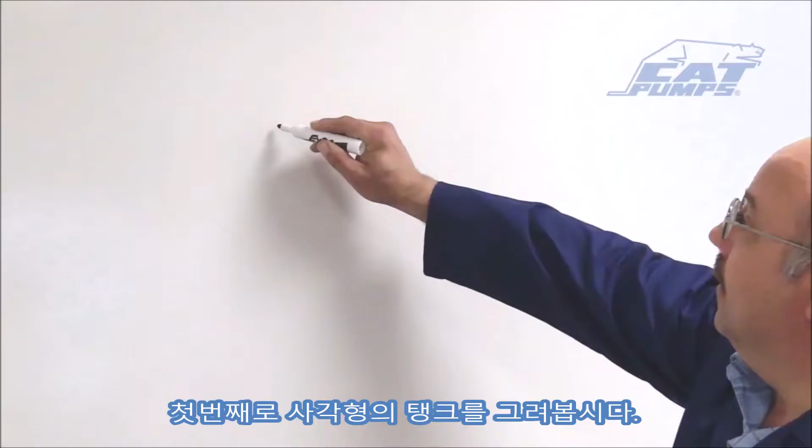So first of all, we're going to draw a nice rectangle feed tank, and we're going to connect to it an inlet line that goes to our pump.

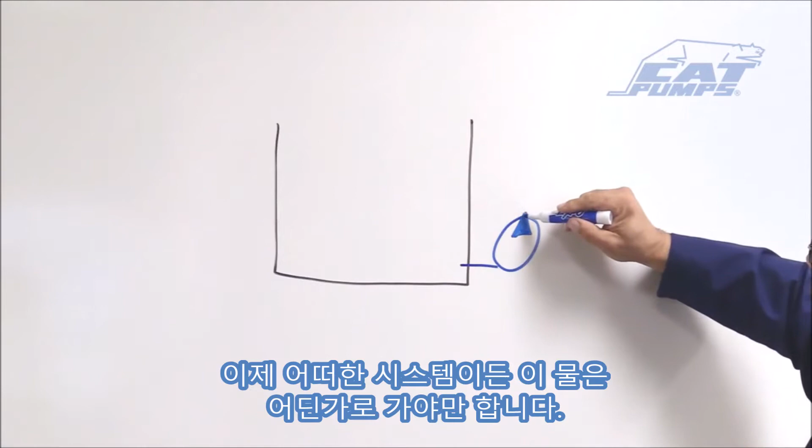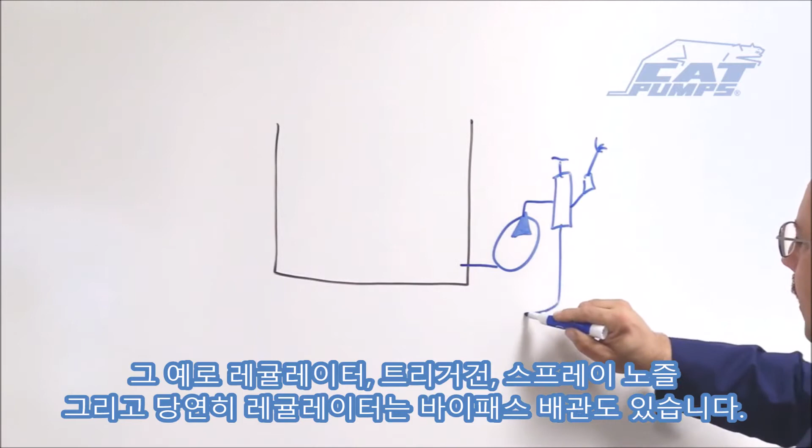Now with any system, this water has to go somewhere afterwards, so we're going to put in a little regulator here, trigger gun, spray nozzle, and of course the regulator will have a bypass line coming out of it. So we have to route this line back to the tank.

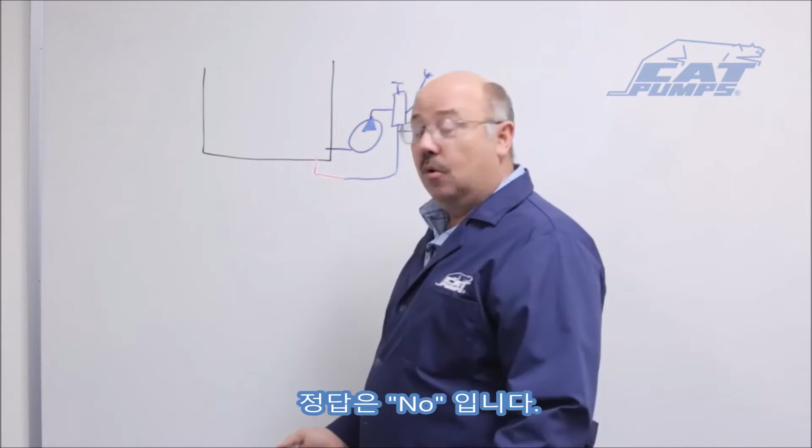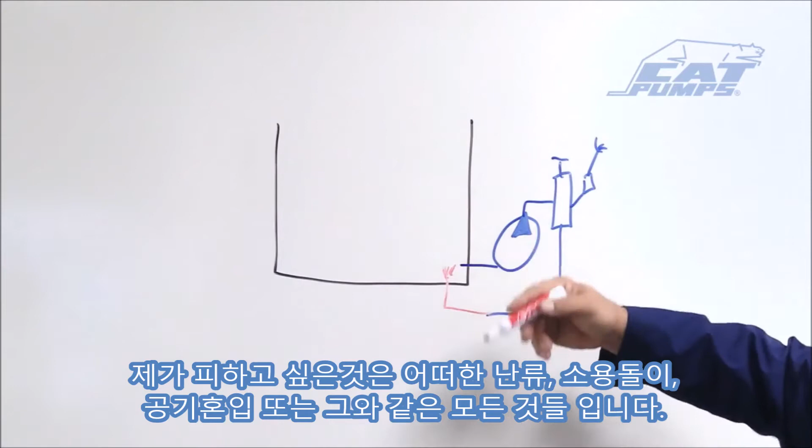So do I want to put it here? The answer would be no, because I'm going to get a lot of water coming back here, and this is my line going from the tank to the pump. What I want to avoid is any turbulence, water eddies, and air entrainment that can get drawn into the pump and cause problems. So I'm not going to run my bypass line there.

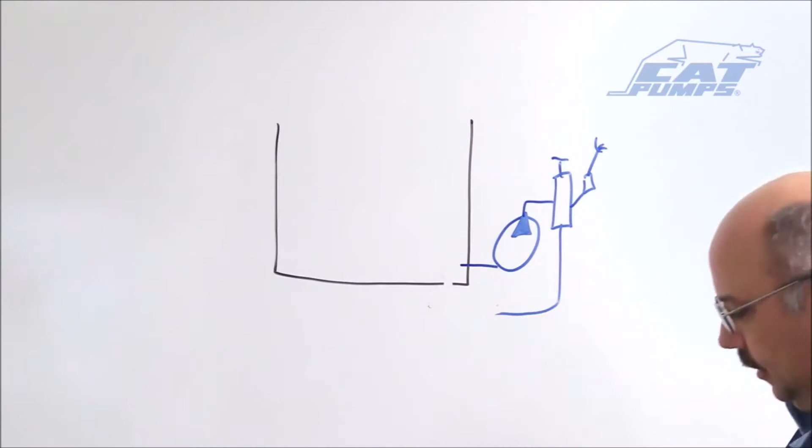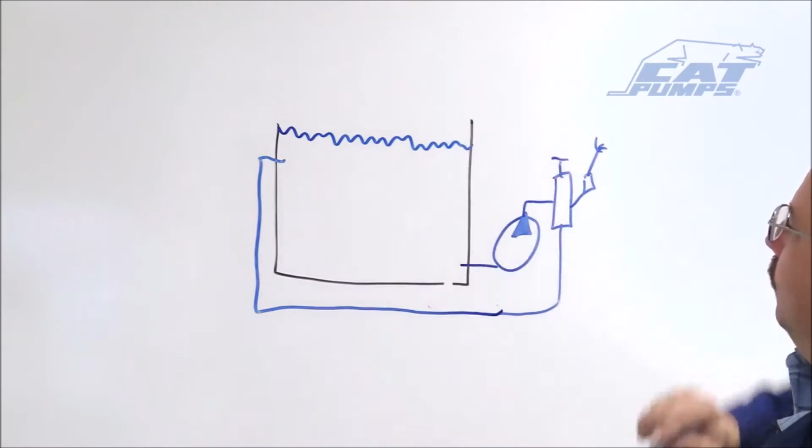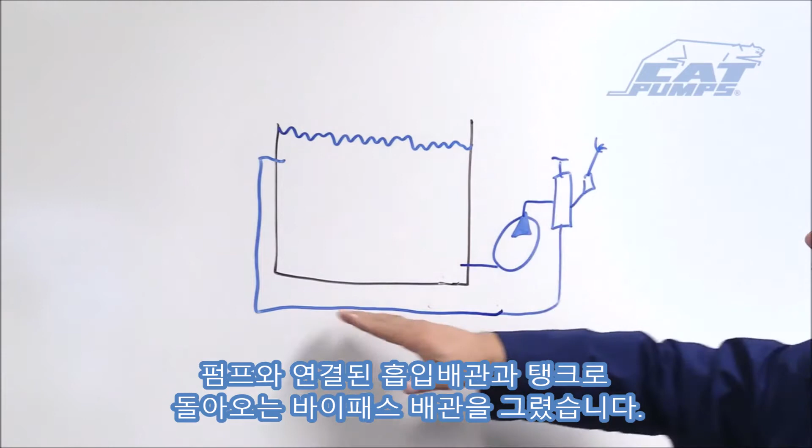I'm going to actually take the bypass line and run it over to the other side of the tank near the top. And of course I do have a level of water in here, and I got to repair this little hole I made so that it holds water. So now I have my inlet line to the pump and the bypass line coming back to the tank here, and this is my water level, so everything is good.

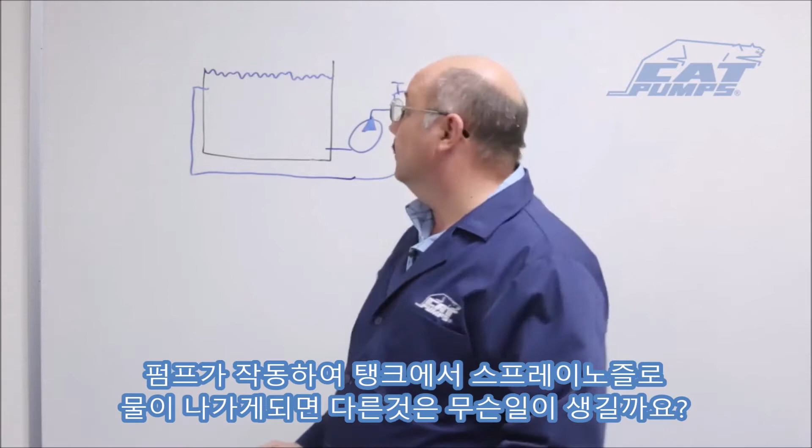Now the other thing that happens is when the pump is operating, it's going to draw water out of the tank as you spray out the spray nozzle. So as we're sending water out the nozzle, the tank's going to start to come down, so we've got to fill the tank at the same time.

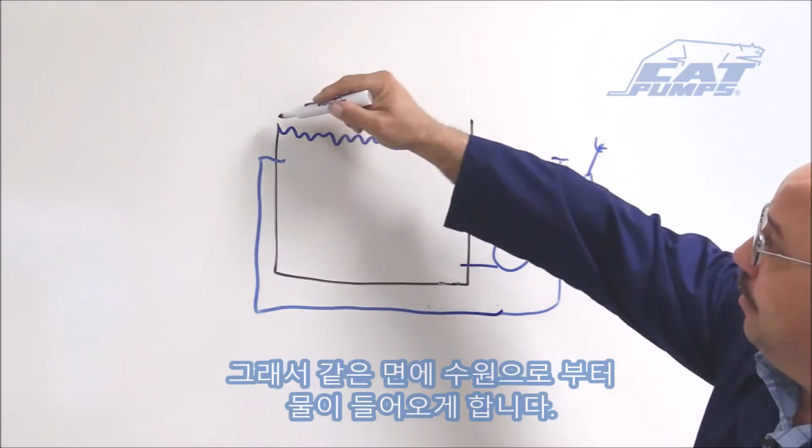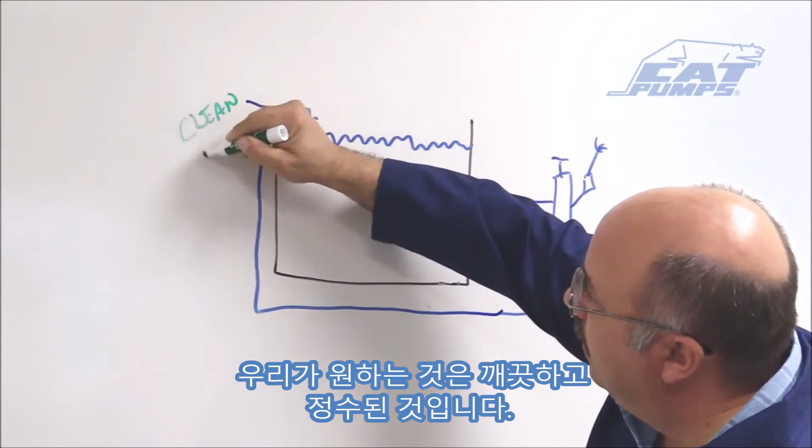So on the same side as the bypass line, I'm going to come in here with a source of water, and what we want here is we want clean and filtered. The reason we want this clean and filtered is if I don't clean and filter it at this stage, I'm going to have to do it at this stage, which is my inlet line.

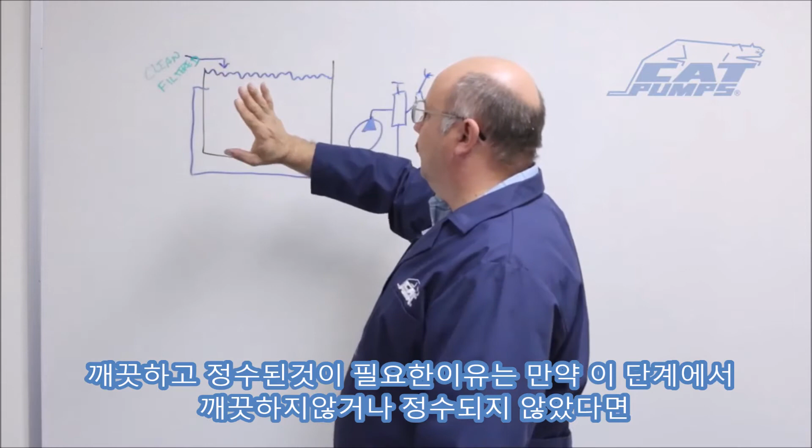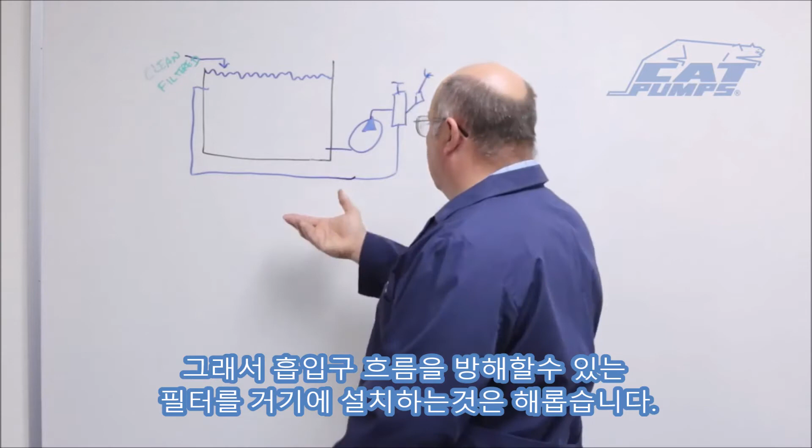And I don't have a lot of inlet pressure because of the vertical distance of the water here. I don't want to put any restrictions in the inlet line that are unnecessary, and putting a filter in there that can clog and restrict my inlet flow is detrimental. So I'm going to clean it and filter it before I drop it into the tank.

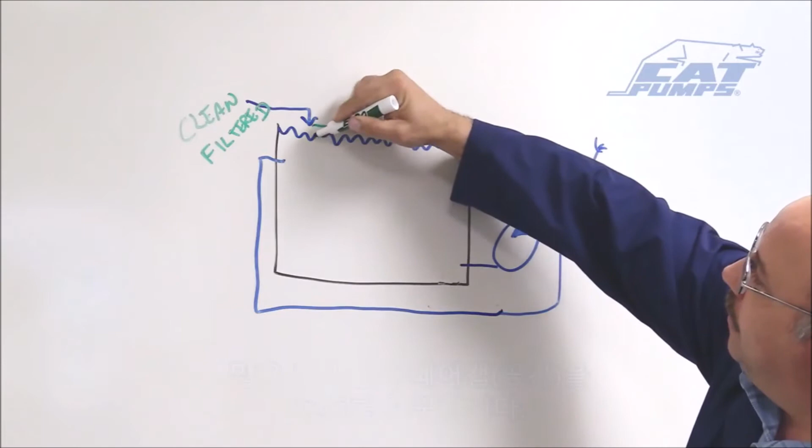Now a lot of city codes will require an air gap here so that the water comes out of the piping, goes through a little bit of the air, and into the tank. That way there's no chance for this water to go back into the city water system. So there's an air gap there.

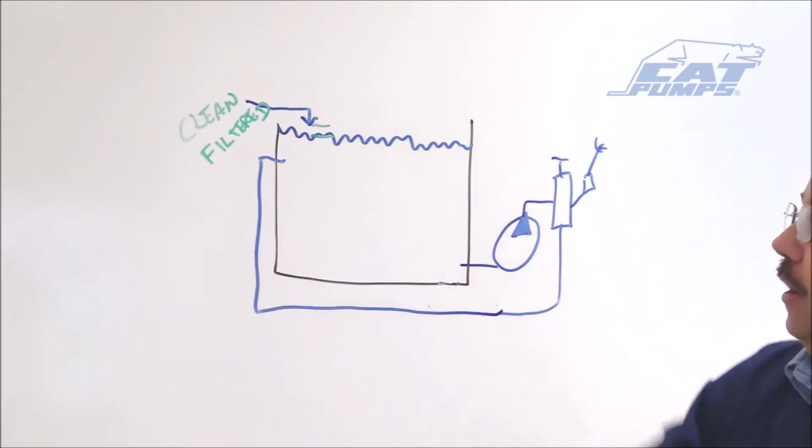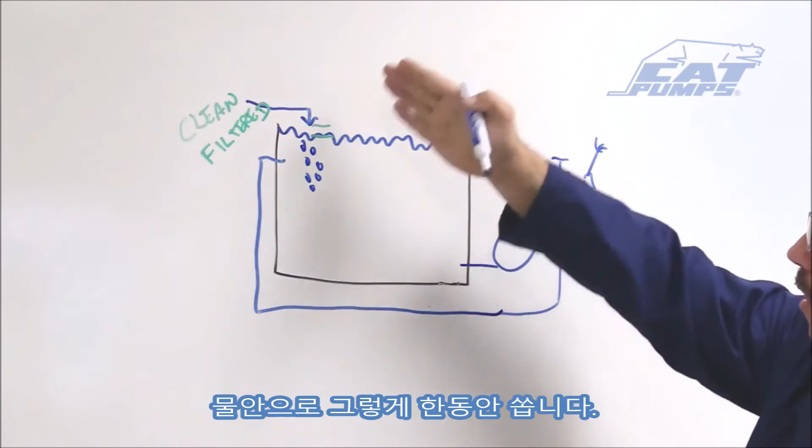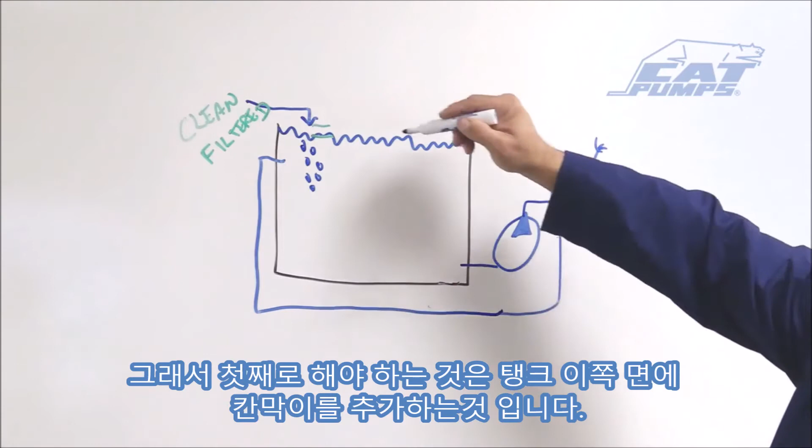Well, when you have an air gap and you're shooting water in here, it's going to create bubbles and things that shoot down into the water for a while. We want to make sure the tank is large enough so these bubbles don't migrate over and get drawn up into the pump. So the first thing we can do is we can add a baffle right here on this side of the tank.

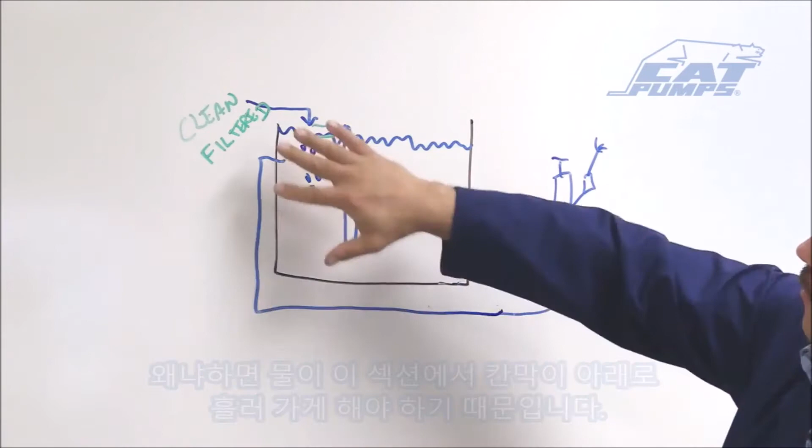And I'm going to put it above the water level, but not quite to the bottom of the tank, because I want the water from this section to flow under that baffle. That way these air bubbles are trapped in this portion of the tank and they can be dissipated out.

Now, there's particles and things that can still possibly be in the water that I don't want to get to the inlet of the pump. So I'm going to add a second baffle here.

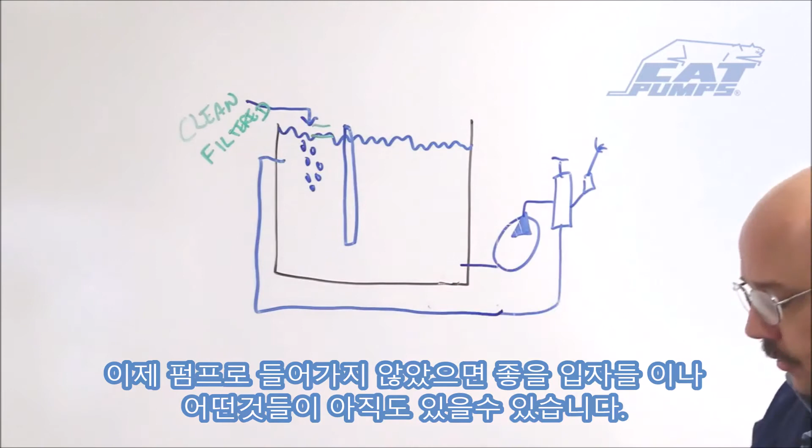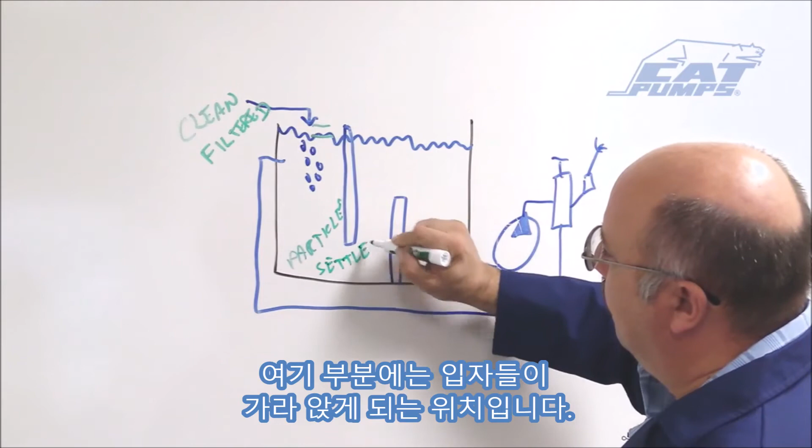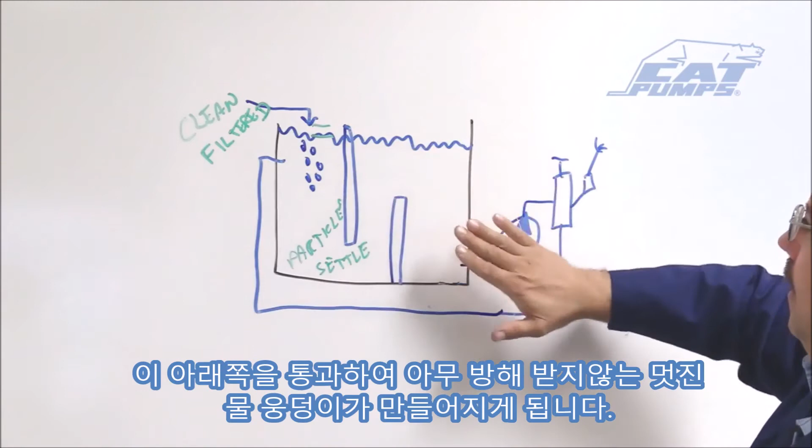So then in this area here, we have where the particles will settle out into this portion of the tank. That way as the water flows in through here, the bypass line as well, comes through here, under here, up and over, this area of the tank is a nice, still pool of water undisturbed, so that as the water is drawn out for the pump, it's nice and smooth, there's no turbulence.

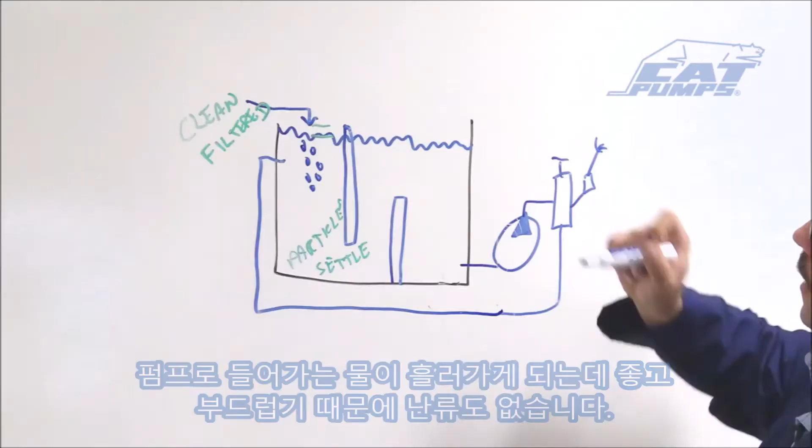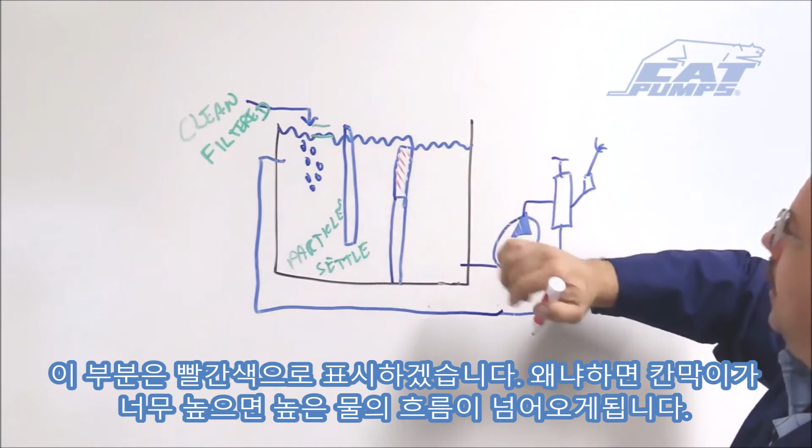Now, another thing to watch for is if the baffle is too close to here - I'm going to put this in red - because if the baffle's too high, then I have a high flow of water coming across here. As this is drawn down and it starts to spill over, it can create an effect like water over a dam at the bottom. It's very, very turbulent. So we want to avoid that.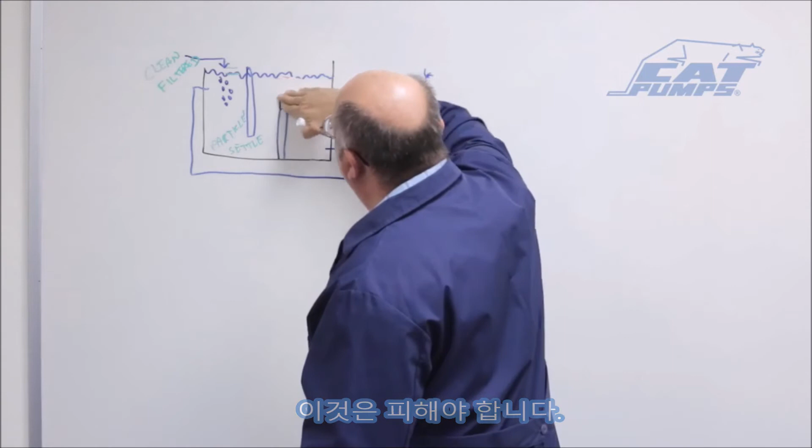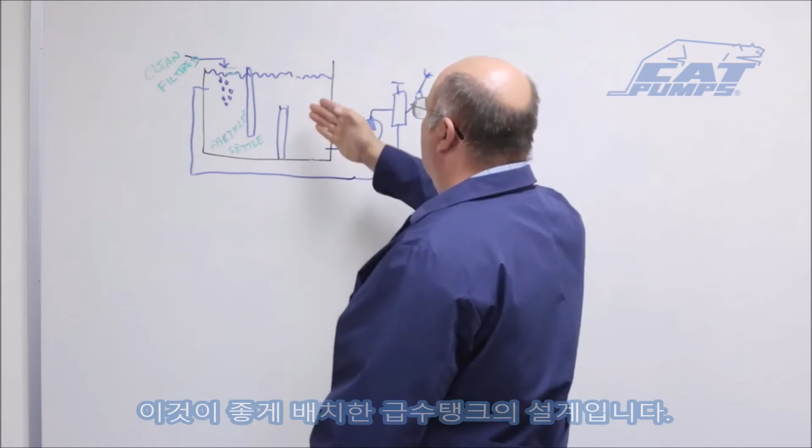We want to have a nice flow of the water, just enough so that we don't get the particles coming up and over that baffle. And that's a good inlet arrangement for a tank design.

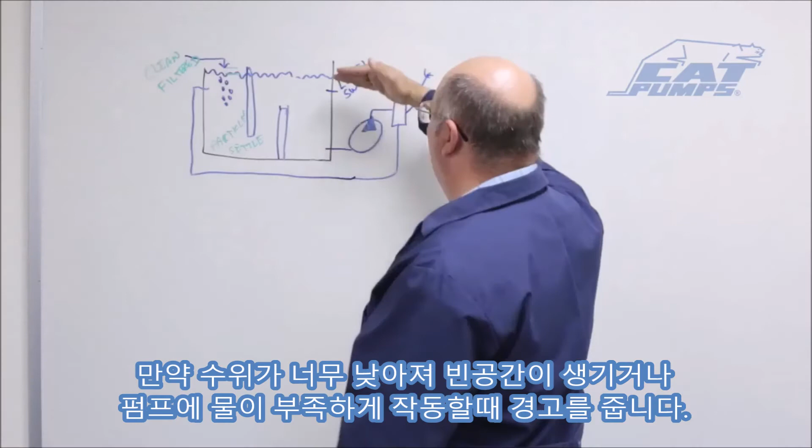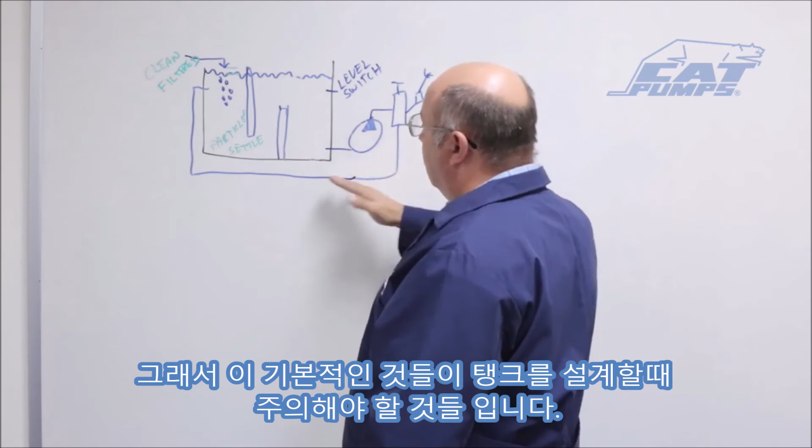The other thing we want to do, last thing, is right here we want to add a level indicator or a switch, something that will warn us if the water starts to get too low, that we don't want to empty this pocket and starve the pump, run it without water, because that would not be good for the pump. So these are a couple of simple basic things to watch for when designing a tank, and the last thing to cover is the size of the tank.

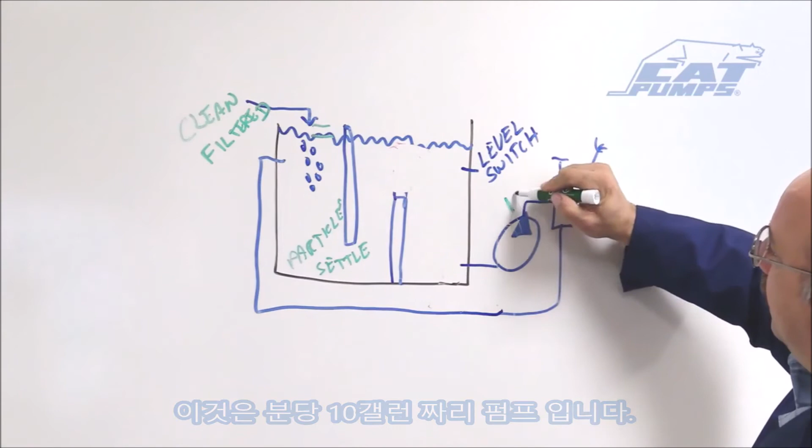Let's say this is a 10-gallon-a-minute pump. Then we want a 60 to 100-gallon tank, 6 to 10 times the capacity of the pump. The pump is 10 gallons a minute, we want a 60 to 100-gallon tank.

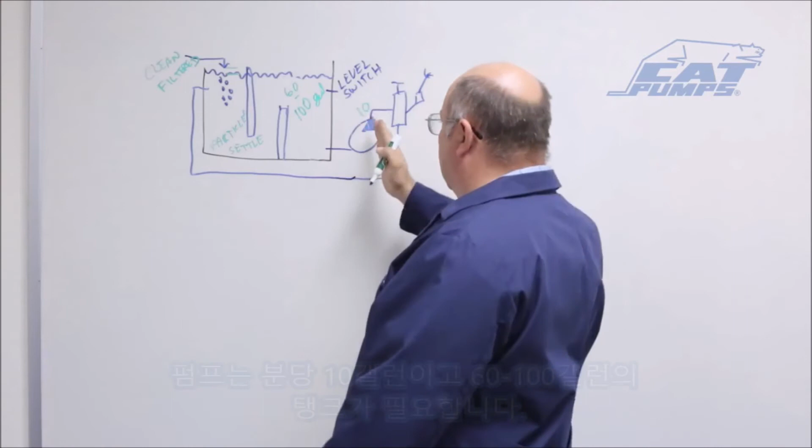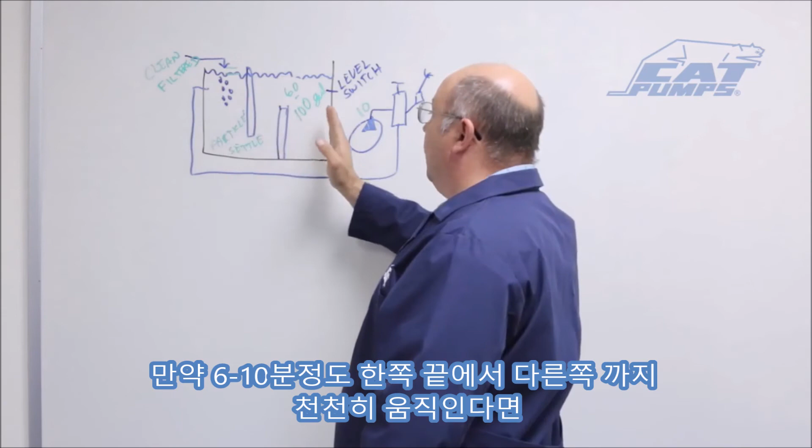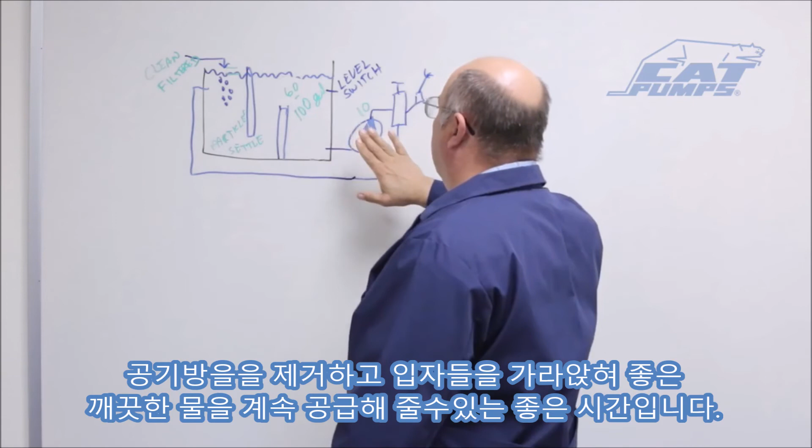That will ensure us that we have a nice, slow-moving water through this tank. If it takes 6 to 10 minutes to move from one end of the tank to the other, that's very slow-moving - a good time for the air bubbles to dissipate out, the particles to settle, and continue to have good, clean water for your pump system here. And those are the basics of good tank design.